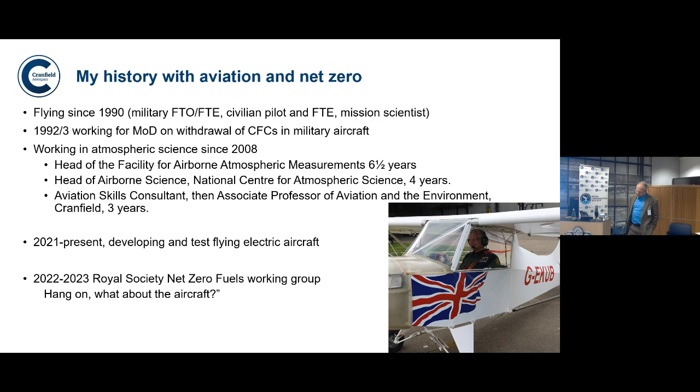So that's why I ended up working on this report, and that's how I ended up here.

So firstly, let's just talk very briefly about the Earth's energy balance with space. We've all heard a lot about it, and I'm sure there's a few people in the audience who are skeptical about it. What I am going to say is it's not simple. This is the simple version for a scientist, showing the complex arrangement of energy in, energy out, energy bouncing, energy coming in from space, bouncing off cloud, energy being emitted from the Earth, being bounced back into the Earth off cloud. It's complicated.

And what essentially is going on that we are calling either global warming or climate change is chemicals we have put into the atmosphere making very subtle changes to the chemical reactions, particularly around what's referred to as the UTLS, upper troposphere and lower stratosphere. That is shifting the energy balance and causing the troposphere, that's the lower level of atmosphere that we're all sat in at the moment, to warm.

Now, this is not new science. The first publications suggesting CO2 emissions may cause warming were published in the late 19th century. But by the 1950s, this had become mainstream science, and the people who study climate were starting to think this is actually a significant feature we should all be thinking hard about. There was a brief period in the 70s when a minority of scientists said, actually, we think the world is cooling down. That science was fairly rapidly discredited, and we've continued to understand it as we have done since about the 1880s, that man's emissions into the atmosphere are causing the planet to warm up.

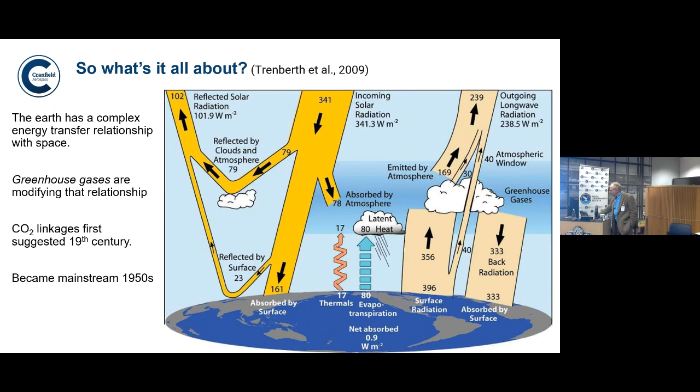What is this doing to our planet? The troposphere, the lower level of the atmosphere, it's basically from here up to around 36 thousand feet, high around the equator, lower around the poles, is warming up on average. And it's really important to appreciate this because it's changing the overall planet's behavior, and there will be places that are warming up by a lot more than the 1.5 to 2 Celsius we're currently worrying about.

There are other places that will actually be getting cooler because of the changing patterns, but on average, it's warming up. By the way, the stratosphere, the next layer above, is actually cooling, and the tropopause, which is the layer between the troposphere and the stratosphere, is lifting. It's going upwards.

Climate change is also having an effect on winds. Winds around the planet are basically driven by the temperature difference between the poles and the equator. One of the things happening with climate change is that the poles are warming up more rapidly than the equator, so that temperature difference is reducing. The effect of that is to reduce the strength of winds overall around the planet.

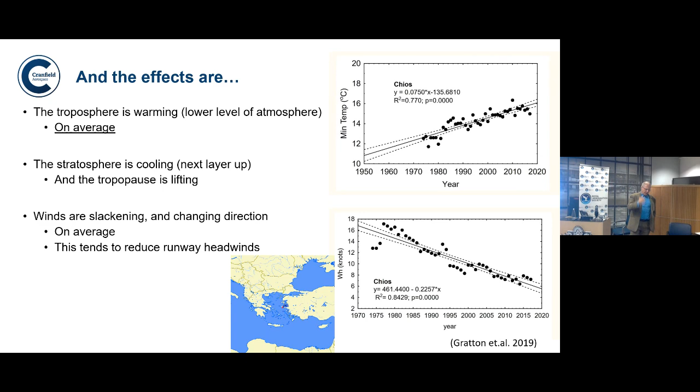We know this is all caused by pollutants. We talk primarily about carbon dioxide, but as I said, my career started worrying about CFCs. There are also other gases like the NOx, the nitrous oxide compounds, we worry about.

So let's talk about the other side of this, because this is where net zero fuels come in. What's aviation's contribution? You can see on this diagram, fossil fuel production and distribution are the biggies. Agriculture is actually the second biggest polluter in the world, and aviation is buried right down the bottom.

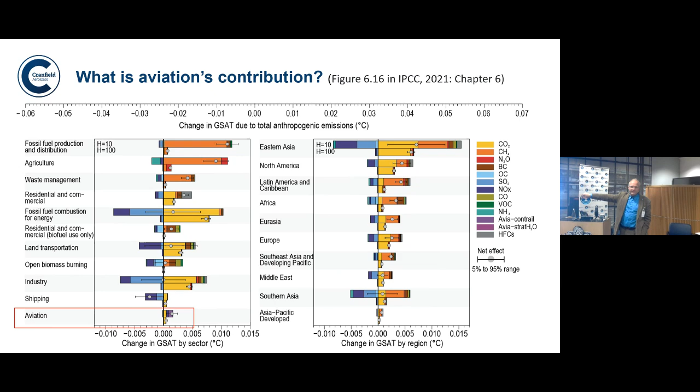Let's zero in on that. This is the impact of one year's emissions from aviation on global climate change. Over a 10-year period, you can see we've got a breakdown here: it's about a quarter, maybe a third, of our impact from CO2, then a bit less than that from nitrous oxides, and actually the biggest component is contrails.

It's not CO2. When we go over 100 years, contrails are short-lived, and actually the CO2 is everything. But it's really quite significant to point out that this is not the major contributor to climate change.

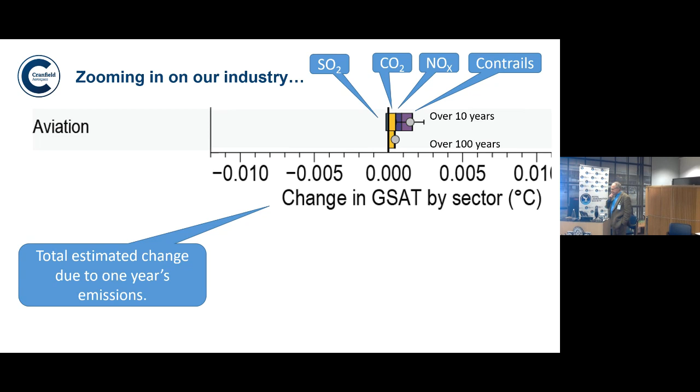Which raises the obvious question: why are we worrying about aviation's emissions? At the moment our CO2 is around 2.5% of the world's CO2 emissions - that is the global aviation industry.

We are really good at improving efficiency as an industry - per passenger mile, our emissions are reducing by about 2% every year. That sounds quite good. However, particularly when we factor in the contrail impact, our overall impact may be nearer 7% - rather more than just 2.5%, albeit still less than 10% of the world's emissions.

Here's another problem though - as an industry we are continuing to grow. Yes, there was a glitch during COVID, but we're pretty much on an upward trajectory again. Our historical growth rate is about 5.3% a year. In recent decades this is mostly air transport for the growing middle classes in countries like India, China, the South American continent.

So let's do a quick bit of maths. Take our 5.3% a year growth, subtract from it our 2% per year improvement in efficiency, and do a bit of maths - what that says is our total emissions are increasing by about a factor of 2 every 21 years.

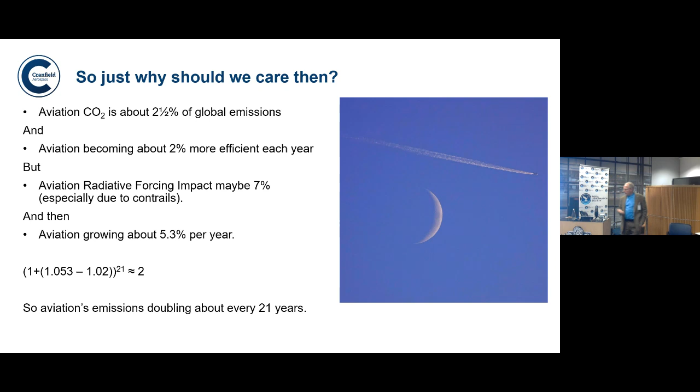By the way, where's that 2% per year improvement come from? Quite a lot of it's from operational improvements, stuff that anybody who operates aircraft will be familiar with. We're flying less holds than we used to. We're doing better at delivering direct routings. Continuous descent approaches have reduced emissions. We're also operating aircraft closer to 100% occupancy. That's operational improvements. Technological improvements.

Lower drag aircraft. Just look at the front of a 747 versus a 380, and it's fairly clear that the 380 is a generation later and has cleaned up the drag around the shape of the nose and the windscreens and so on. We've electrified a lot of ground facilities instead of nasty, messy diesels on the ground. We've also got better at high temperature combustion within engines, which is producing less CO2.

That may not actually be a win, because there's generally a trade-off that if you are producing less CO2 because you're burning hotter, you may be producing more nitrous oxide, which is a worse greenhouse gas. So that might not be a win unless you do what way too many people do and really crudely just measure the CO2 and don't think about anything else. And fleet replacements, because newer, better, more efficient aircraft are replacing legacy fleets all the time. And regulation changes, because the world's authorities, backed up by ICAO, have been enabling and enforcing all of these improvements. That's where our 2% has come from.

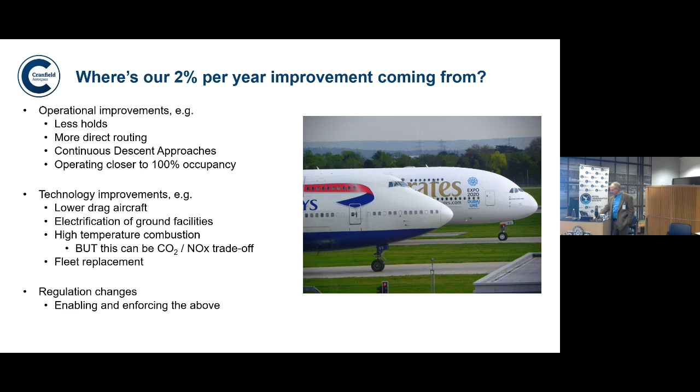So our emissions are increasing against a background of everybody else trying to reduce theirs. And unfortunately, we have a fundamental problem, is that a tank full of kerosene is just about the best way anybody knows of storing energy in a lightweight manner. So we are really reliant upon liquid hydrocarbon fuels.

So how do we reduce emissions? First thing I would say is we should all be thinking about CO2 not being our major emission as an industry. Our major emission is contrails. Now, you may see some people say the contrails are exactly 1.9 times more severe than our CO2. Anybody who's quoting it that accurately doesn't understand the science, because the science is still young. It's about double. It might be as low as 1.5. It might be as bad as 3. But contrails are definitely worse than CO2.

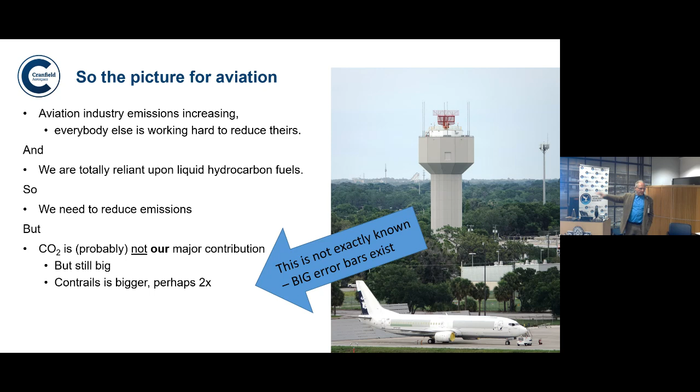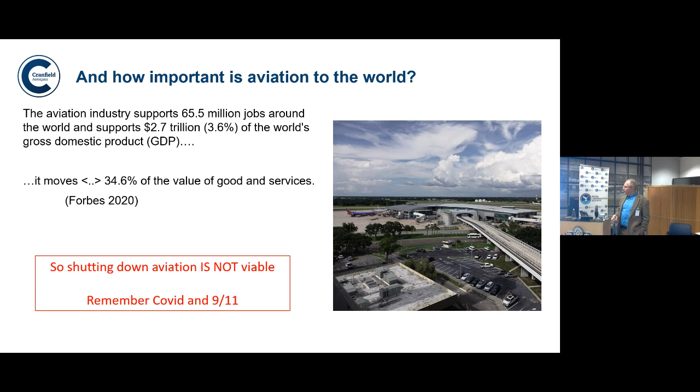We need to also remind ourselves that for the whole world, aviation is really, really important. An article from Forbes in 2020 reckoned that the aviation industry supports more than 65 million jobs around the world. It is supporting a significant, albeit single figure percentage of the world's GDP. It is moving over a third by value of the world's goods and services. So shutting down aviation is not viable for the global economies. This is not the right answer. Flight shaming people into putting other people out of jobs, I do not see as a solution to the problem we have, but we still have a problem.

Let's just remind ourselves, we've seen 2 major aviation shutdowns in our lifetimes. We've seen COVID and we've seen 9/11. How disastrous were they for families, for industries, for communities globally, just from the inability to travel by air? We don't want that, but we do need to fix our emissions problem.

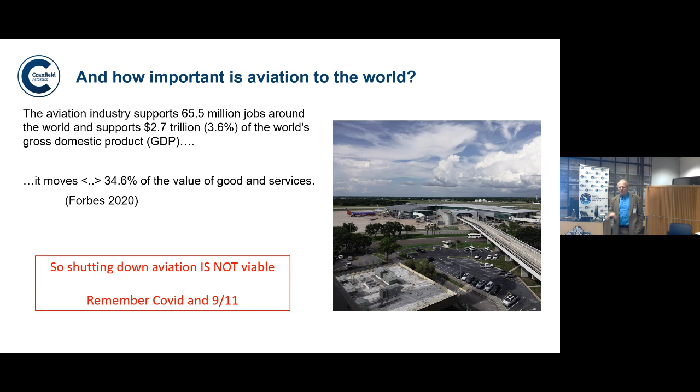That is what a contrail is. And it's fairly obvious. We all know, you go out in the winter, on a cloudy day, it's warmer than it is on a clear day. Why is that? Because the clouds reflect the heat back into the Earth that it is emitting as a black body infrared radiator. So that is what contrails do on net.

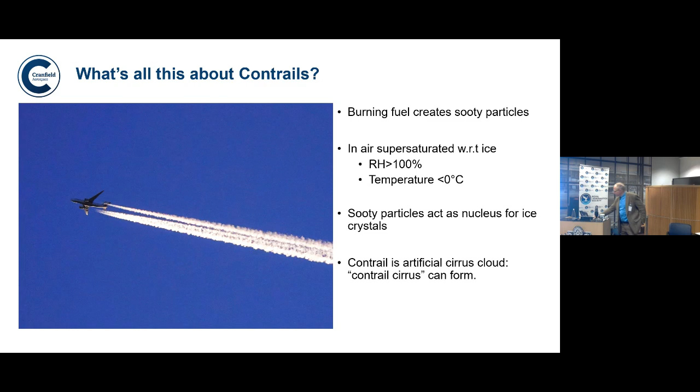Now, the obvious thing that goes through most people's heads at this moment is, but they don't last very long. They last from minutes to maybe a couple of days for a really persistent one. That's absolutely true. The effect is so much greater than that of CO2, however, that they're still having a greater overall impact. But this does mean if we can work out how to stop contrailing tomorrow, by the end of the week we've just shaved 5% off mankind's contributions to global warming, which in my book would be really worth doing.

Can we do this tomorrow? No. Simply because right at the minute, our science is not good enough. We've got a formula, something called the Schmidt-Appleman criterion, which predicts the creation of contrails. We've got weaker science that predicts their persistence. We've got other science that predicts its tendency to trap heat into the Earth and to reflect solar radiation back into space. In reality, that science is not yet good enough to allow us to do this, and we need to improve that science.

We also need meteorological models, use the new science to predict contrailing and integrate that into air traffic management. That would be a fundamentally good thing regardless, because one of the problems most commercial pilots are well aware of, in any part of the world, is most of the world does not have integrated meteorology and air traffic control. Simply for safety, things like avoiding thunderstorms, integrating meteorology into air traffic management would be a fundamentally good thing. So we could be doing that now while we do the science, and then integrate the better science into the MET models, into the air traffic management, which would most definitely get my vote as the low-hanging fruit of reducing aviation's emissions.

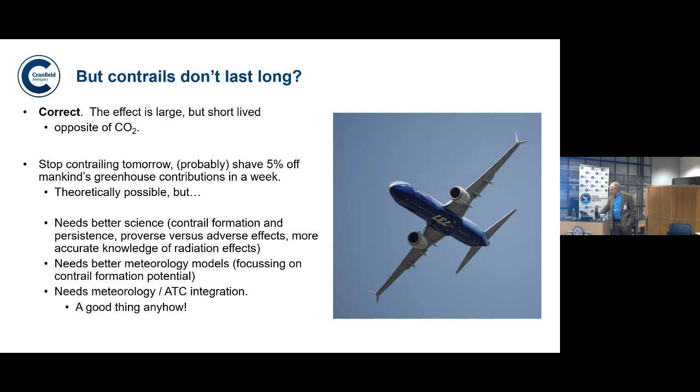So for the people at home, you have exactly the same position, and you can probably have read it by the end of my lecture.

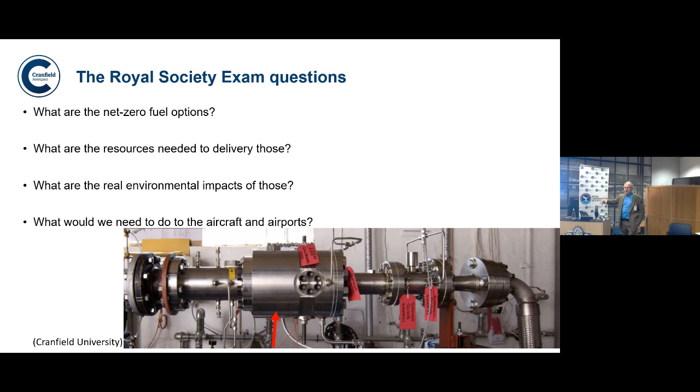So the first and most ideal solution is drop-in fuels, what a lot of people are calling SAF, Sustainable Aviation Fuel. Now, this report very deliberately never uses this term SAF. Why? Because it's too nebulous. There are too many different technologies and too many different feedstocks that you could group together with very different characteristics and call them all SAF. So we very deliberately avoided this term, and we just called any individual fuel exactly what it was.

Most of what's being talked about in this space, though, at the moment is biofuels. It is the use of agricultural products or waste products to chemically process and create a synthetic fuel that can be put into a jet aircraft tomorrow to allow it to fly.

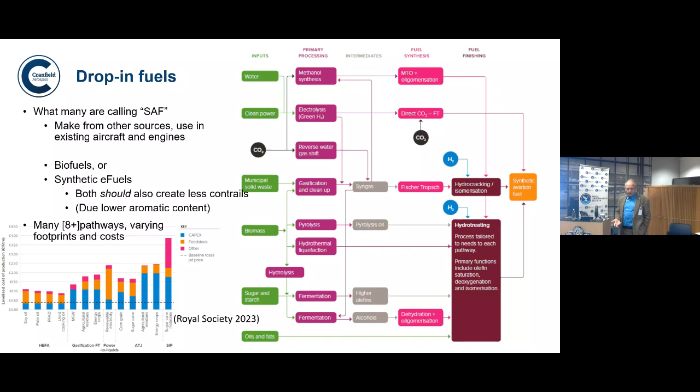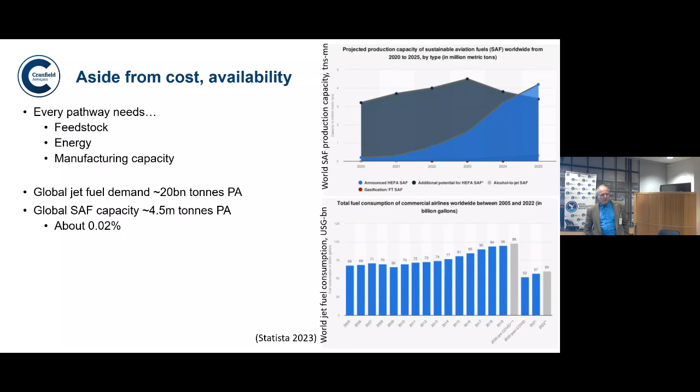We run the numbers on what the process is, what amounts we would need, and we come up with: use rapeseed oil, we need 68% of the UK's agricultural land. Use elephant grass, and it's somewhere between 54 and 33%. If we go for wood, it's between 66 and 30%. So as an absolute minimum, we need 30% of the UK's agricultural land if we are to grow our own jet fuel.

Now, around a decade ago, I went to a conference on this at ICAO's headquarters in Montreal, and a fellow from the United Nations turned up and said, guys, do everything you can to reduce emissions except jeopardize food security. That's the one thing you're not allowed to do. And I don't think that position has changed in anybody's minds whatsoever.

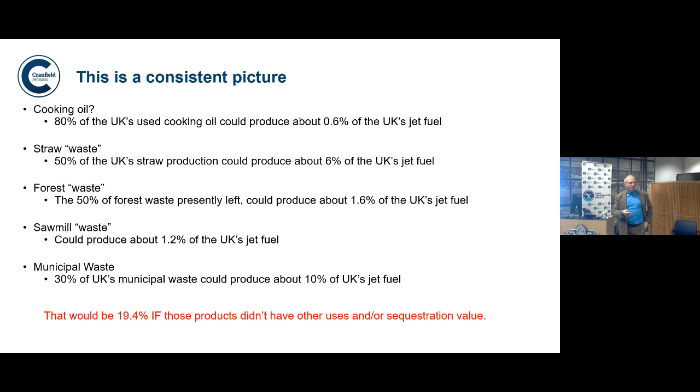Which raises this question: is there actually any point in what are being termed sustainable fuels? Well, yes there are, and no there aren't.

In the short term, any reduction in fossil fuel use has got to be beneficial because it is reducing our emissions, and it is holding on to those resources that we might want for plastics manufacturing in the future. Anything that looks like a circular carbon cycle, where we're growing stuff which has taken CO2 from the air, turning that into fuel, burning it in jet engines, and then that releases CO2 which we pull back into the plants, is better than taking fossil fuels and putting them out into the atmosphere.

But the feedstock capacity limitations mean this is not a total solution. We have to keep remembering we are in competition with hundreds of other industries who all want that feedstock too. The best standards I'm aware of offer around 40% reduction of the carbon footprint of current fossil fuels. Agriculture is not carbon neutral itself, so reducing our carbon footprint by 40% is well worth having, but it is not net zero.

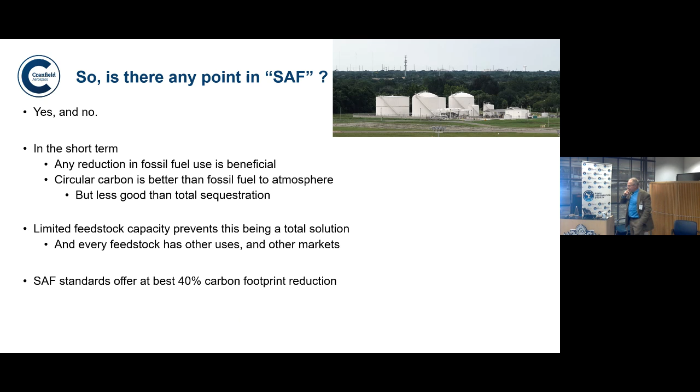So medium to long term, yes, we still need to do biofuels. We still need to grab what we can now, but they are not our long-term solution. This is my message: this is not me saying don't do this, but this is me saying that is not your overall solution. We need new fuels, and at the moment we've basically got three choices: hydrogen, ammonia, and efuels. I'm going to go through all of these. Efuels is the only one that looks fairly similar to current kerosene and would allow you to drop it straight into a current jet aircraft.

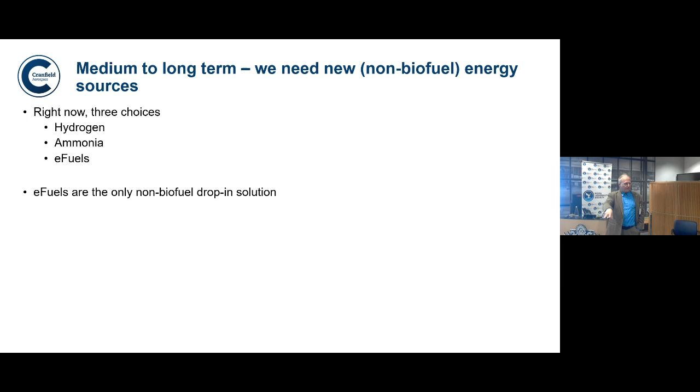Start with hydrogen though. I like hydrogen. I think it has massive potential for solving our future problems. However, we don't know how to do all of that yet. So hydrogen, H2, comes in three colours. You may have heard this reference to grey, blue or green hydrogen.

Grey hydrogen, which is about 95% of the world's production at the moment - this is take natural gas, superheat it with steam, and you pull off CO2, which you just dump into the atmosphere, and hydrogen, which you can then use in your hydrogen burning engine, fuel cell, whatever.

Blue, which should be relatively easy to do - it's grey hydrogen, but instead of dumping the CO2 out into the atmosphere, you trap it and pump it underground where the temperatures and pressures lock it down there so it doesn't come back. Blue hydrogen is clearly far better than grey hydrogen. The problem with blue hydrogen is it's still using fossil fuels, so we're still using that fixed existence resource.

Green hydrogen is where we take renewable energy and fresh water, electrolyze it, and create hydrogen. That is 3, maybe 5% of the world's hydrogen production at the moment. But to be fair, there are a lot of very clever chemical engineers around the world working really hard to massively increase our production capacity globally for green hydrogen. So green hydrogen may be the answer to a lot of problems, and I am really interested in it.

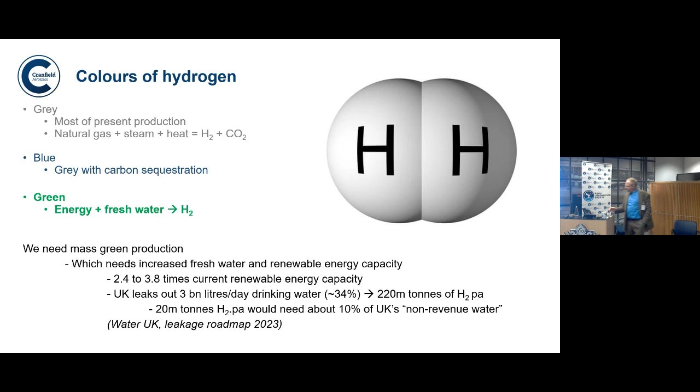Can we build hydrogen aeroplanes? We've built hydrogen aeroplanes. The hydrogen islander there, okay, that hasn't flown - it's still in work. That's a company called Cranfield Aerospace Solutions. It's on the same site as my university, but we no longer own the company. They are working on that. ZeroAvia, based at Kemble, they've flown this, which is a hydrogen fuel cell Dornier 228. They've previously flown a hydrogen fuel cell Piper PA46 Malibu.

Airbus have got lots of plans. We can do it - we can't do it with current aircraft. So we need people like ZeroAvia, Cranfield Aerospace Solutions, and Airbus to develop the new aeroplanes that will run on the green hydrogen that we're hoping the chemical engineering industry is also going to work out how to produce. I think this can be done, but I would absolutely not trivialize how big a problem this is that has to be solved. But I certainly am totally behind everybody and anybody trying to solve these problems. I don't think we should shut the door on any solution right now, but this is probably the one I would bet the most money on.

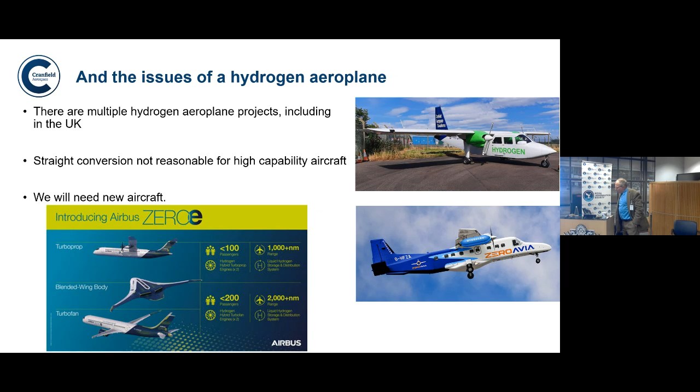Ammonia, what about ammonia? NH3. So what we basically do is use this as a way to carry hydrogen. You run this through a catalyst, crack it apart, use the hydrogen in the same way we would in a pure hydrogen aircraft, and dump the nitrogen over the side - adding nitrogen into an atmosphere that's already 78% nitrogen, not a big deal.

Nobody's flown an ammonia aircraft yet. The safety issues are interesting - it's really hard to burn, it's pretty much explosion proof, but it's extremely poisonous. So if you crash your ammonia aircraft, you shouldn't die in the fire, but you may die of asphyxiation and kill all the wildlife around the crash. Not necessarily the win you were looking for.

There are ammonia research ships. This is Viking Energy, which was originally set up to run on liquid natural gas and is currently in conversion to run on ammonia fuel cell, specifically because the marine industry are interested in exactly the same questions that I am. So I am not discounting ammonia - I think it looks promising, but there is nowhere near enough research yet to either count it in or count it out.

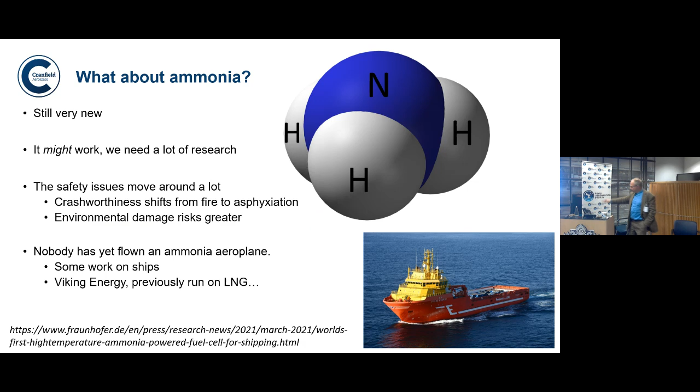What are e-fuels? E-fuels scrub CO2 from the atmosphere, run it through chemical processes, and create synthetic jet fuel. Now that we should be able to use in existing jet aircraft. It could be genuinely net zero by the simple device of scrubbing an excess of CO2 from the atmosphere, locking some of it underground, turning the rest of it into jet fuel - get your equations right. So that actually does look like a net zero fuel.

And there are people working on this. Now, at the moment, it's about 10 times as expensive as fossil fuels. But the other problem is, we need a lot of energy - massively more sustainable energy than we've got at the moment. But it can be done. It has been done - the Air Force have done a single flight on synthetic e-fuel to prove they could, in a simple two-seat aeroplane, but they did it and proved that point.

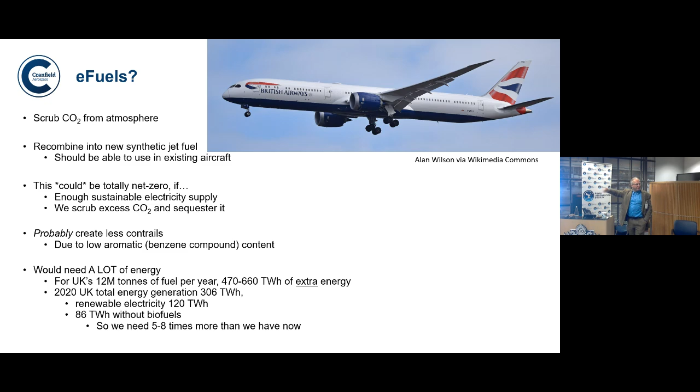So my takeaways on all of this: right now, aviation is not actually a major greenhouse gas emitter. So all the flight shamers, the Stop Flying Now brigade, they don't actually grasp the scale of the issues. They should be protesting outside of our power stations and having very firm words with the farmers about their practices.

But we have to solve the problem for the long term before we become the global baddie. Biofuels will not solve the problem in the long term, not on any solution I have seen.

In the short term, they are an alleviator, and as such, we should be pursuing them. I'm fine with what the Jet Zero Council and the industry behind them are doing in the short term to create a percentage biofuel capability for the UK's airline industry, but it's not actually going to fix our long-term issues. And the industry is chasing the same feedstock as lots of other people who want to produce biodiesel for the roads, biodiesel for ships, or want to use that for manufacturing new plastics. So we are not the only player after these resources.

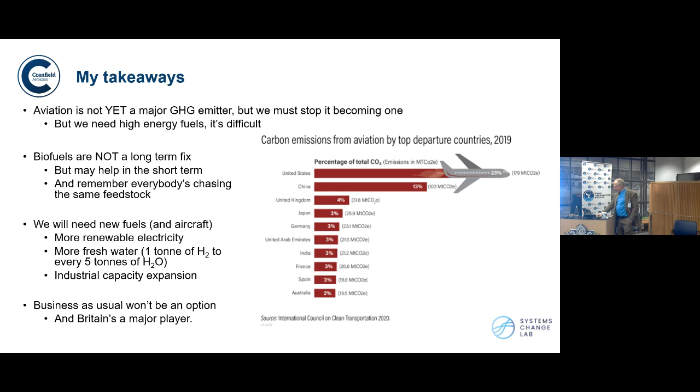I'm a researcher, but we need a lot of research. Contrail formation, persistence and its behavior—we understand a lot, but we need to understand a lot more. Aircraft design: if we're going for new fuels, we're going to need new aircraft, and they ain't cheap. Our estimate at Cranfield is that the cost of certifying a new hydrogen airliner is going to be around $30 billion, which is about 50% more than the cost of certifying the 787. So we're talking big numbers, but not unachievable big numbers.

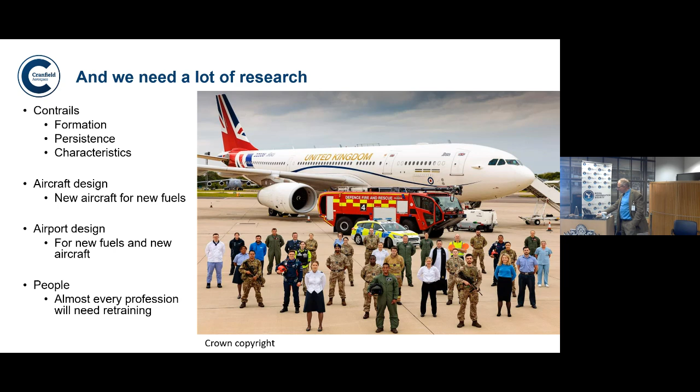I'd also make the very fundamental point: we can't do this on our own, not as an industry. The big player we need is the energy industry. Every possible solution needs a massive increase in the availability of renewable electricity. We also, if we are using biofuels, need agricultural and waste industries to do their bit. Without doubt, we're going to need the chemical and petrochemical industries to do their bit, because whatever fuel we use, they are the people who are going to be supplying it for us.

And by the by, we also need, for most solutions, the water industry. We're going to need a lot of fresh water, which basically means that the water industry needs to massively sort its act out and stop leaking such huge amounts of water into the wrong parts of the ecosystem, because we need that fresh water, and so will other people.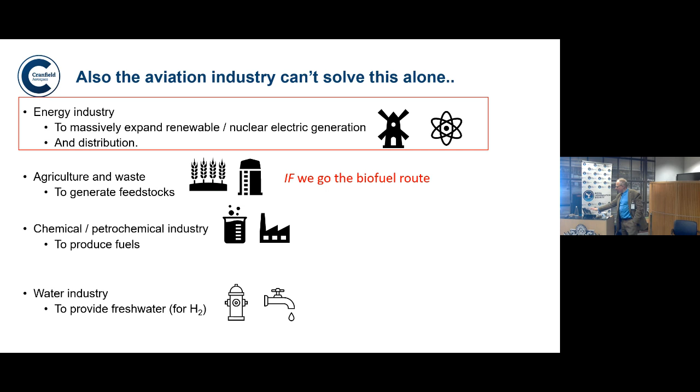And that, pretty much on the hour, was my summary as an aviation professional of the Royal Society report and what it means to our industry. So it means a lot of hard work, it means a lot of change, but it does not mean the end of our industry. It does not mean a disaster, but I would say it does mean an end to complacency—that we are going to have a lot of things to do if we are going to prevent the rest of the world putting the screws on aviation in a way we don't want.

So we are going to have to work, yes, with other industries, yes, with regulators, but this is our problem to own and to solve. But I genuinely believe we can do this. We just can't do it by business as usual. If anyone has any more questions, I'm here till we get thrown out.

Yeah, hi. When you talk about airport redesign, what have you got in mind?

So the question is, what do we need to do in terms of airport redesign? Take all of the gates here at Heathrow - they're basically designed around the assumption that aeroplanes are a long metal tube with a couple of relatively thin wings. If we start going for things with much bulkier fuel tanks, we may well be heading towards flying wing configurations.